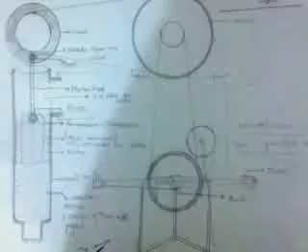Manual water pump. Hi guys, I am Jaideep Naru and I've recently made a manual water pump which basically runs on manpower who rotates this pedal round, from which the conveyor belt is connected.

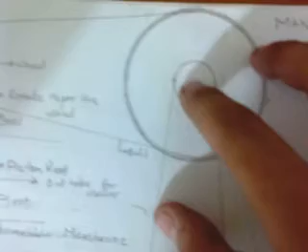You see these two lines - this is the conveyor belt which is connected to this big wheel. This is basically a big wheel and a small wheel. This conveyor belt is connected to this small wheel, and this small wheel is connected to a big wheel, so the lower force and higher results could be obtained for the higher RPM per minute.

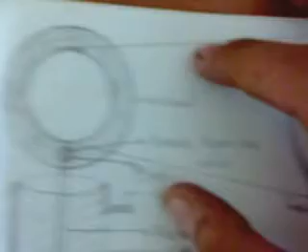With the same mechanism and idea, the second wheel is also done. This belt is connected to a small wheel, and from a big wheel the conveyor belt is stretched to a third wheel, which is beneath connected with a small wheel like this. You see from a diagram - like this, the conveyor belt is connected, and the big wheel.

You see this is basically a pivot, a piston basically. This is a piston and this is a piston rod and this is a pivot. So basically, with this formula, as the person rotates this pedal like this, this makes the wheel rotate.

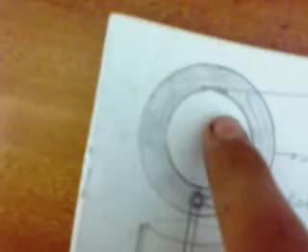And the wheel makes this wheel rotate, from which this shaded portion rotates from left to right, and synchronizing with it, the pivot even rotates round. With respect to this formula, the piston which is drawn here, it moves up and down, up and down.

This is the intake of water. As this pump tube is dipped in a tub of water, and as you rotate this pump like this, the piston goes up and down, which creates a suction vacuum and pulls the water up.

As the water pulls up, the piston is small and tiny - this is a draft design, so I could not make many tubes. In practical time, you can make many tubes so the suction of the water could go up. And you see this is a small permeable membrane so the water could go up.

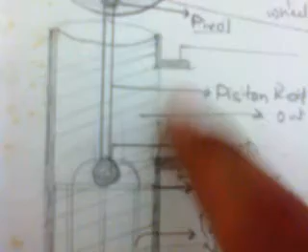And I have also included concepts of thermal physics over here. The tube, you see the tube over here, is basically coated with silver foil so the water is cooled down. And you see the shaded area over here - this is nothing but basically a wall cavity, so the heat couldn't transfer from here to here. It will, but at a large time.

It was, so in the first week I'm quite nervous at this time. So this was my first prototype manual pump with respect to a normal formula of conveyor belts and wheels. You can give a small glance at it again.

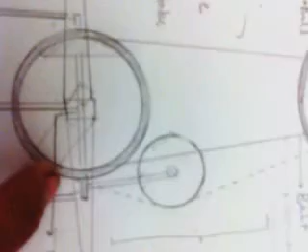I'm sorry, I didn't tell that the rotation per minute, the RPM, can be increased if we involve this technology again - a small wheel with the pivot connected to these stands. So the conveyor belt would be like this, and as the rotation time will decrease, the RPM will increase. Such type of technique and technology is used in high-tech gear cycles.

This is again the manual water pump. You can see the labelings also - pivot, pedal, as I said gear cycles one, belt.